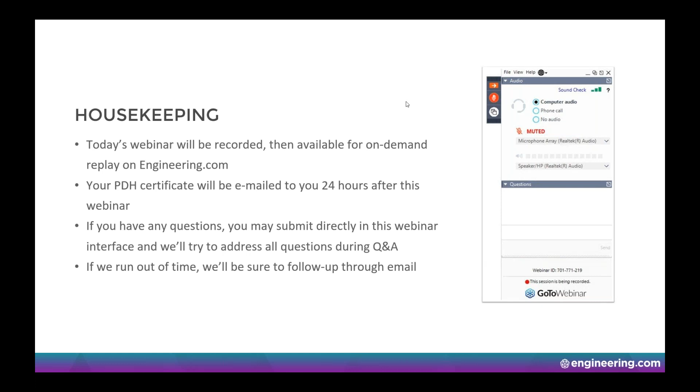Thank you very much for that kind introduction, Maria. Today's topic, as you mentioned, is the future of mobility and how a lot of the goals and ambitions of the future of the mobility market are really shifting how we are requiring the manufacturing design to be made for these modern vehicles. When it comes to picturing the future of mobility, there's a lot of different things we could talk about: e-mobility, autonomy, there's even some people talking about individual personalized flight as being part of the equation for future mobility.

And in that regard, that certainly creates a lot of pressure to engineer and develop the use of the lightest body material in order to address the range anxiety that would be brought upon by most vehicle electrification issues. What we're seeing is that before electrification was the topic of the day, it was always advantageous to try to find a way to make the vehicles a little bit lighter. We talked about fuel economy before and how making cars out of lighter, stronger materials was very important for making the most out of our gas mileage.

But now with vehicle electrification, there's even a greater emphasis on taking the kilograms of the body and transferring those into things that add more value to an electrified or autonomous vehicle. It turns out that with this shift from petroleum-based internal combustion cars towards battery electrification or maybe even fuel cell electrification, the cost per kilogram, or the benefit per kilogram shaved off of an auto body, becomes much higher than what it was traditionally for an internal combustion traditional bodied car.

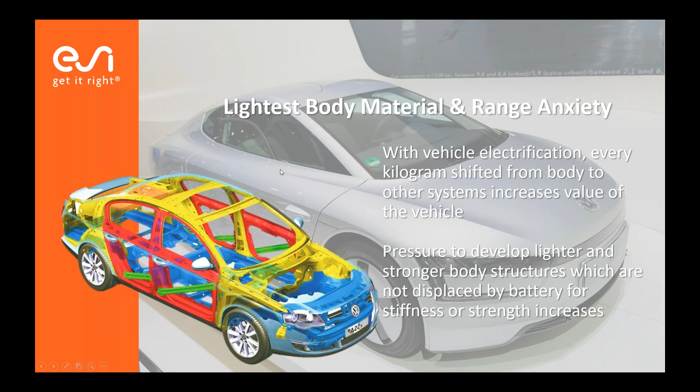So I'm going to start off with this relatively famous quote that is allegedly attributed to Henry Ford. Back in the day, people said Henry Ford was quoted as saying, 'Any customer can have the car painted any color that he wants as long as it is black.' That's the quote that I often read online attributed to Henry Ford. But the question is, why? Why was it important to restrict the choice of color to black?

It turned out that one of the reasons why all of those Model Ts were painted the same color was that it allowed them to optimize the production. By picking a paint color and paint formulation that optimized the fastest amount of drying time on that assembly line, they were able to standardize the assembly line speed and rate of production.

Now imagine if we tried to put the kind of flexibility that we offer today in different paint colors, but that also meant different paint drying times or curing times back in Henry Ford's day. That meant the conveyor line moving cars through the assembly line would not necessarily travel at the same speed on days they're producing black cars versus white, green, silver, or red. That would not have allowed them to optimize what we think of today as mass-produced auto manufacturing.

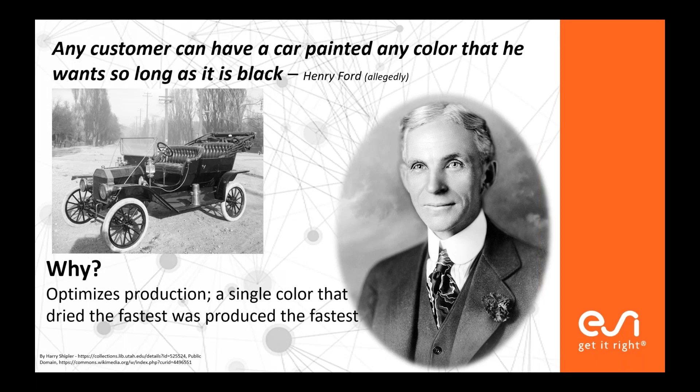So I want to take a small parallel to that when I consider what that means in today's auto industry. Here's a quote you could attribute to just about anybody who worked in the auto industry for the past 100 years: you can have a car of any material you want, as long as the bodies are stamped sheet metal panels welded together for subassemblies, then assembled as body-on-frame or unibody.

Because that's the conventional way cars have been built for the past century. Every time you talk to people about automotive body, the phrase 'body in white' immediately makes them think sheet metal, if not sheet steel only - stamped sheet metal parts welded together to create the auto body.

The reason why is that product performance and production capabilities have been well balanced for the past century. Making an automotive body as an assemblage of, in many cases, several hundred individual sheet metal stamped panels welded together has been outperforming most other proposed technologies for the past century.

Now, before I get too far, people could probably object and raise their hand with a question: weren't there examples of people doing things that were not stamped sheet metal bodies throughout history? Of course, we could each think of a handful of them. But the reason we can do that is because it was exceptional.

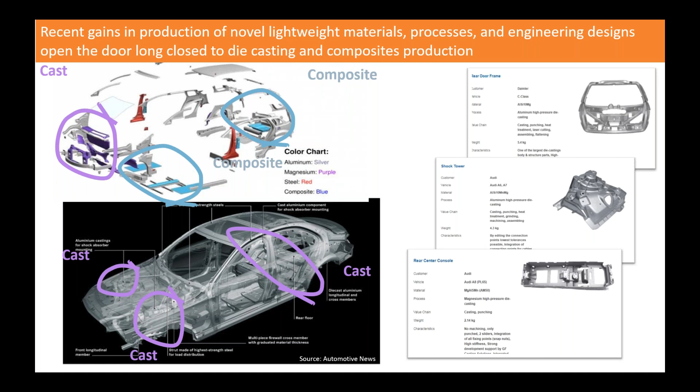But I've recently read a few articles about how Ford's been using that to address some of their mass savings, as well as a space-saving design for their Ford Explorer sport utility vehicle.

We're seeing examples where entire truck bed boxes are being put together with a mixed material structure, where we're seeing a mix of glass fiber reinforced carbon fiber composite materials. We're seeing steel and aluminum mixed into what normally was an all-steel body structure inside of a vehicle like that GMC Sierra truck box.

We're seeing vehicles such as the proposed Chevrolet Malibu and the Cadillac CT6, where they're looking at a mixture of steel, aluminum extrusions, and die-cast aluminum making up the bulk of these automotive bodies.

And we're also seeing things like that passenger bus in the upper right-hand corner being made of large composite panels to replace what normally would have been an array of different sheet metal parts stamped and assembled to make up that vehicle body.

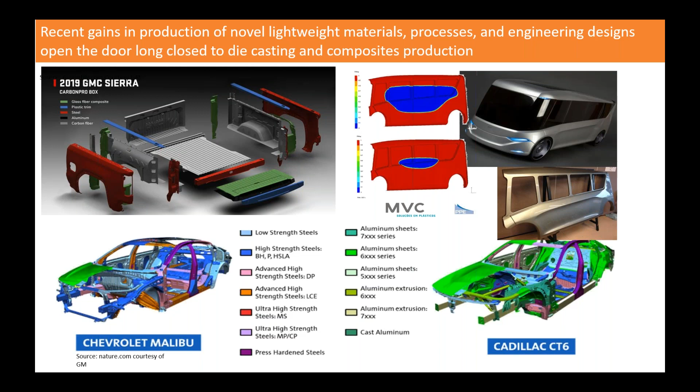So one of the things that we see in trying to address these goals of future mobility, and what they're trying to do to reduce the mass of the traditional automotive or transportation body, is embracing some of these novel manufacturing techniques like high pressure die casting of aluminum and the use of carbon fiber reinforced plastic. This helps drive down the mass going into the auto body so that they can put more mass into the battery, into the motors, into the passenger compartment itself, to put mass where the value added really is.

But this brings a lot of challenges to us. One of the challenges facing the transportation industry as they address these shifting manufacturing requirements is that they have to be able to predict with confidence the individual part production and the feasibility of the parts and the piece part costs of those individual parts.

And they have to do that very early. They'll need to be able to anticipate potential production issues arising from the as-designed geometry versus the as-engineered manufacturability requirements. And they will need to address and mitigate challenges with joining these dissimilar materials, with very different assembly and different materials, to address these assembly distortion issues that could happen. And they need to do all of this early enough to make a difference.

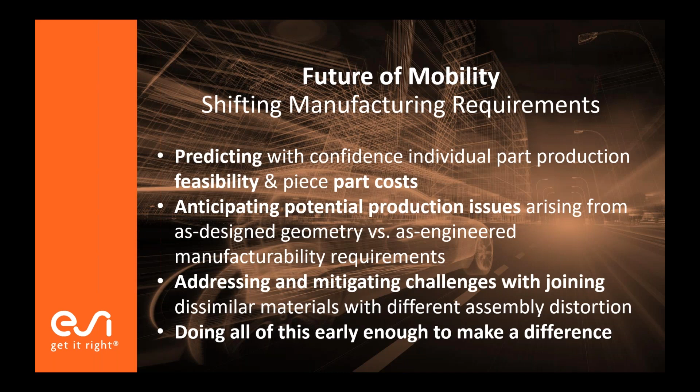That's probably one of the overarching challenges we face today: the individual automotive OEMs and much of the supply chain are all serving the industry where the manufacturing method dictates where that product goes onto the new cars. Now that I'm mixing ideas, like putting casting materials in with the body, we're mixing disciplines. Body used to just be a stamping world. Now body is a stamping, casting, and composites world—a very transformational thing that the industry will have to address.

Now, this is not unprecedented. We're not talking about anything brand new. I did a little research and found out that several years ago, Magna, a major automotive tier 0.5 or tier 1 supplier, had already proposed making a multi-material door at a lightweighting design conference. They proposed a mixed material ultralight door design that was functionally the same as a conventional door, but at a 40% reduction in mass.

They achieved this by mixing stamped sheet metal with high pressure die cast aluminum for the A-pillar reinforcement, introducing stampings combined with extrusions alongside normal conventional stamped sheet metal, as well as high strength materials such as warm formed aluminum for the door reinforcement beam, and possibly other advanced high strength materials elsewhere in the panel.

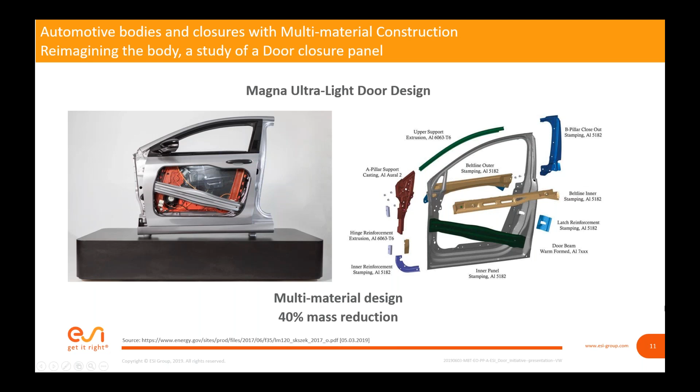That brings up a big challenge for the manufacturing industry to address this closure panel, which is presumably on just about every other car that you and I touch every day. It's all stamped sheet metal with trim attached to it. Now the idea is presented that an integral part of a vehicle, such as its closures, could in fact be made up of a series of materials. For that Magna example, it was predominantly cast material, extrusion, and stamped sheet metal, because those are the materials Magna is most often involved with in the supply chain.

Now I've introduced on this slide a possibility of a similar door using stamped sheet metal, high pressure die casting, and also composite materials to make up that door. Because maybe we could talk to other automotive suppliers, other members of the supply chain, who instead of just focusing on sheet metal and metal fabrication, were working on that full range of materials.

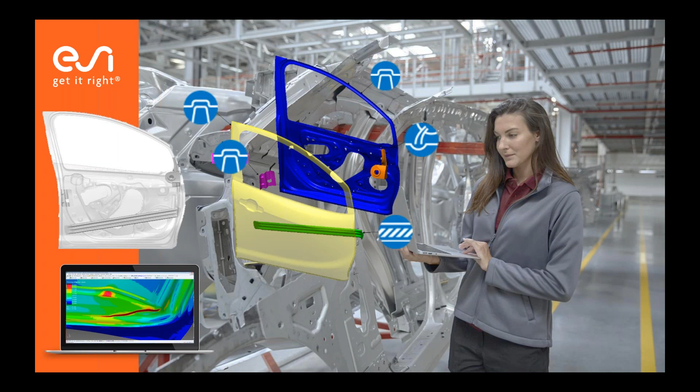That's what we'd like to address today: if we are going to address this idea of multi-material manufacturing, I'm proposing we do this in the context of what I'll call the ESI door. The ESI door is similar to that door from the Magna Group, proposed to be manufactured out of a variety and range of material manufacturing domains.

So we've introduced traditional sheet metal stamping. We can stamp the door inner and door outer out of sheet metal, in this case high strength steel and dent resistant steel. That's very typical for a conventional automotive body.

We could introduce an advanced high strength steel striker reinforcement, but now we could mix it up by proposing a die cast aluminum pillar reinforcement, similar to the one proposed for that Magna door, because maybe we can create an even lighter weight pillar reinforcement if we use die-cast aluminum to replace what in many cases is a mixture of many different stamped parts. Now we could have a single component taking the place of a more complex multi-body stamped and welded assembly.

Similarly, in this case we've proposed a cross member, but our high strength cross member maybe we'll propose making out of a composite material.

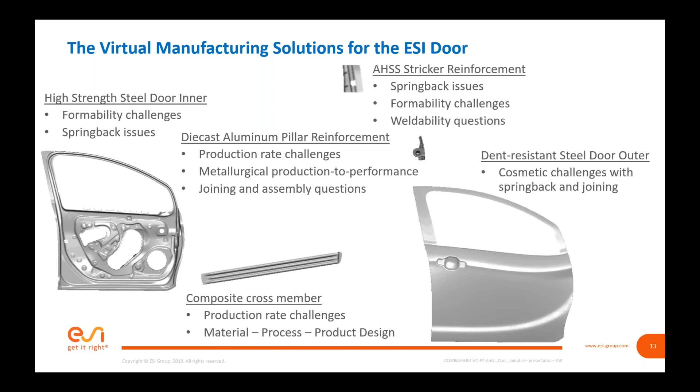But now people are talking about, in some cases, maybe it was 10 minutes per part. And how do we align these different manufacturing domains, these different manufacturing processes in order to combine into a single manufactured good. All of these are challenges facing today's automakers as they address this idea of mixing materials.

So first of all, I do want to mention that, in this case, let's talk about casting. People talk about casting and is it plausible and is it realistic that we can mass produce these mass reducing parts like a cast chassis or cast body structure in an automobile. A lot of people have said it's just not reasonable that we could ever meet the production rates necessary to support these large automotive mass production schemes.

They've been able to get a lot of efficiency gains in recognizing that every time you cast this complex chassis component, you are replacing a multitude of individual stampings, or in some case, maybe it might have been individual hydroformed rails or something making up a similar architecture body structure. If you were doing it that way, you would still have a much more complex manufacturing environment, because instead of being two large castings that made up that part of the body, it might be 20 or 30 individual stampings, countless number of spot or seam welds that would have to put that thing together.

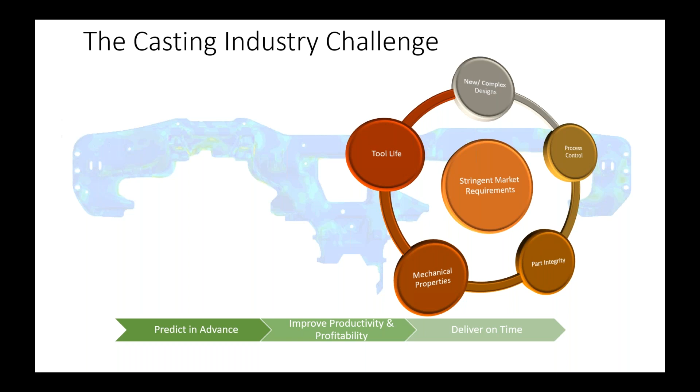And can I do so in a productive and profitable way? Can I achieve that high enough throughput and efficient enough use of manufacturing resources that I can, in fact, produce the part as necessary to be productive and profitable? And make all these decisions fast enough and early enough that I know I can go forward with this design or not.

So some of these challenges in introducing die casting into the body is that these die castings are being designed to replace entire subassemblies and complex structures for cost savings, but that also increases the make or break pressure on the manufacturability confidence.

Because if I'm talking about that shock tower in the Ford Explorer, and if I was doing this in a conventional stamped and welded manufacturing, if that shock tower did in fact have a manufacturability issue in one area, sometimes I can still change an aspect of that stamping or stamped assembly without severely impacting the cost of tooling, the cost of production, and even the entire product design itself along the way.

But now if I introduce this complex die casting to replace all of those different stampings themselves and those different subassembly operations, if something is found very late in the game to make that die casting impossible, then I run a higher risk that I just end up with nothing manufacturable in that shock tower.

Instead of asking for a small engineering change in a little bit of a reinforcement bracket or in one area of the stamping, I'm talking about major redesign of the product shape. And that could be very disruptive to our go-to-market confidence for these new vehicles.

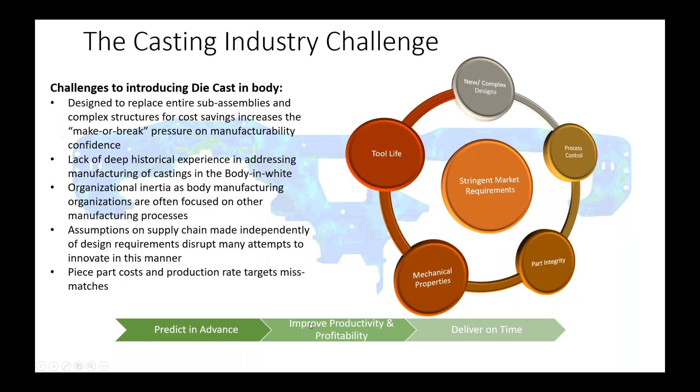So we introduced this idea that body manufacturing will need to, as early as possible, take into consideration the manufacturability of these body products, right? So they will have to very early be able to validate that the geometry of the part and the material properties of the part, as defined by its role in the performance, is a good fit—can the tool actually be filled with the molten material at the right production rate?

Will it cause or trigger the right behavior when it comes to the cast material solidifying? Will we have product performance issues and product shape fixation issues triggered by these challenges in turbulence and solidification behavior in our cast materials? Will we have the right microstructure once the material has fully cooled so that we have the right product performance, without introducing any sort of distortion or residual stresses that could cause our completed product to have the wrong performance characteristics?

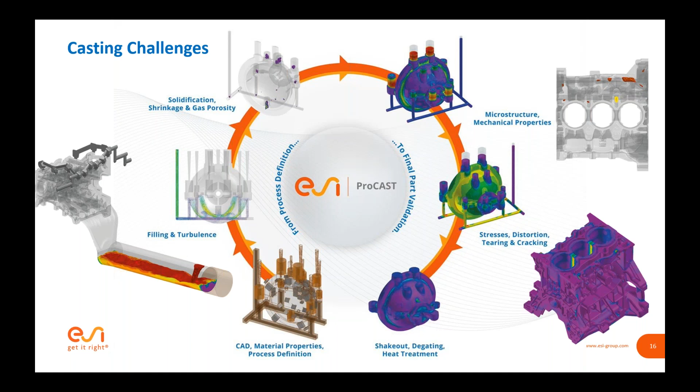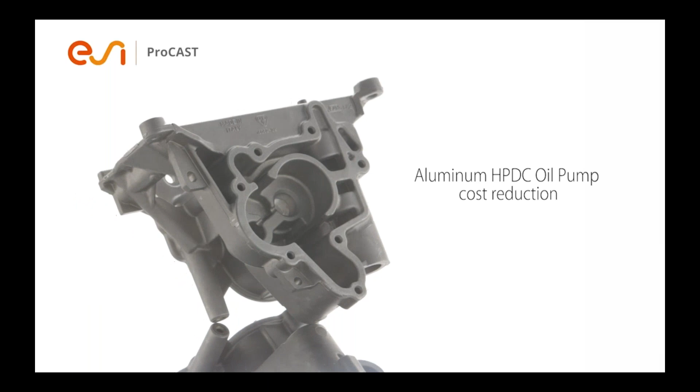So at this point, just want to introduce—I mean, this isn't a body component, but this is no more complex and no less complex than some of the body components that I suggested could be replaced with high pressure die casting in the future.

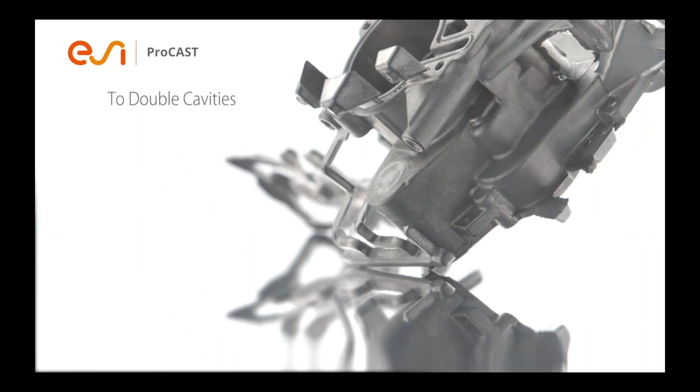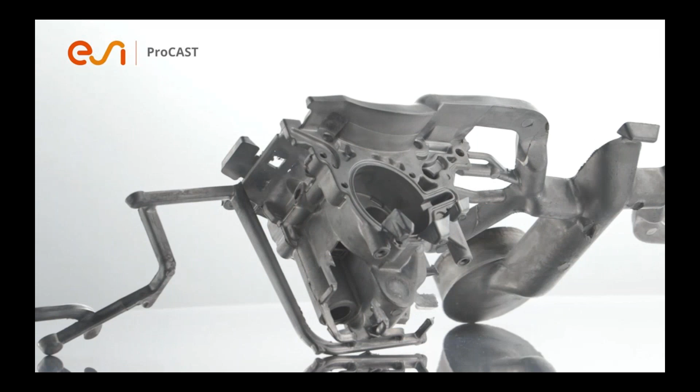And one of the things that helps introduce this idea of whether we can have high pressure die casting do the right thing for body manufacturing, is to see if we can increase the production rate.

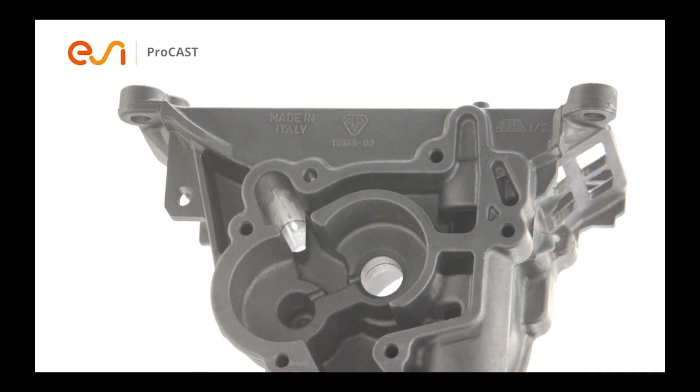So here's an example of how we were able to use predictive analytics to show that we could convert a previous single cavity die casting, which would have had a certain expectation for production rate, piece cost, and investment for the supplier to supply it. Now we're able to validate in advance that they could effectively double their production throughput if they moved from a single cavity casting to a double cavity casting.

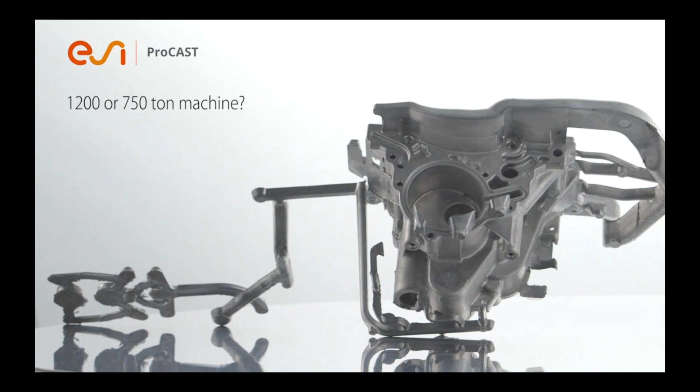Similarly, I have examples from some of our other automotive customers where we've allowed them to go from a 4-cavity casting to as high as an 8-cavity casting. And this is the kind of thing that'll have to happen for these die cast components to be able to fill the gap of the production rate expectations that people have for these body components expected in body in white and casting.

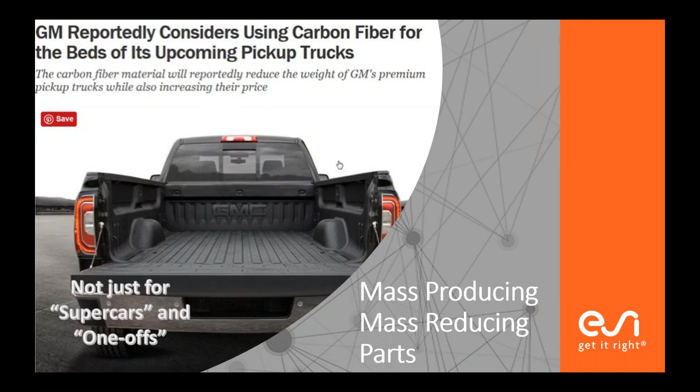The other novel use of material that we introduced in the ESI door is this idea of doing carbon fiber. Carbon fiber is one of those things people say, yeah, it's good for aerospace and supercars and specialty project cars, but not really suitable for mass production. However, GM is reportedly considering using carbon fiber in the beds of all their pickup trucks. Actually, this is a relatively old picture, and this is already their current GMC Sierra pickup truck.

So now when we think about composites and what challenges they represent if we want to integrate them into our vehicle bodies and body structures, we see how different composites engineering is from other ways of engineering vehicles. One of the things I've learned in my recent education about composites is that product design and material selection are totally inseparable from considering the manufacturability of that component. It's impossible to decouple the idea of a net-shaped composite and assume it's crash-worthy without someone proving that composite structure is even plausible, just from getting the alignment of the glass fibers correct, and the type of resin and its behavior.

So this idea of engineering individually the product design, material selection, and manufacturing - you can't separate those when you think about composites. This iterative loop between product design, material, and manufacturing is always concurrently going on for composites manufacturing. It's nearly impossible to assume something is good without doing physical testing, and again proving that the manufacturability of that part is correct and achievable in the physical world. This has been a challenge for many people trying to figure out how to mass produce composite parts to satisfy the needs of the auto industry.

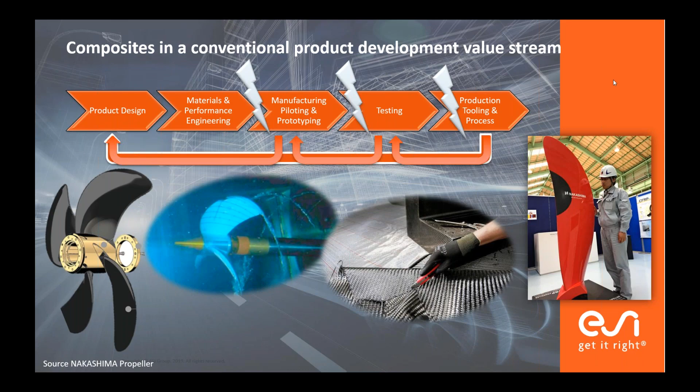So that means in order to address this, we have to do our best to address those challenges in advance. One of the challenges in composite manufacturing is that, again just like casting, if we're designing that composite body to replace a whole set of other individual stampings and subassemblies, that really drives up the pressure that every composite body component is really make or break. You really have to know that individual part is feasible far enough in advance to know whether or not you're replacing those other components out of sheet metal.

We still have this lack of historical experience of people in the auto industry who've worked with different resin formulations, different fiber types, different manufacturing modes for these carbon fiber reinforced plastics materials. We still see that having a body organization look at more than just sheet metal stamping is going to be a challenge for many organizations. We see that suppliers of body components are really just hyper-focused on, oh, they work in sheet metal and automotive, then they can do body. But as soon as you introduce the fact that there might be composites in that body, the sphere of people who already have experience at industrial scale shrinks.

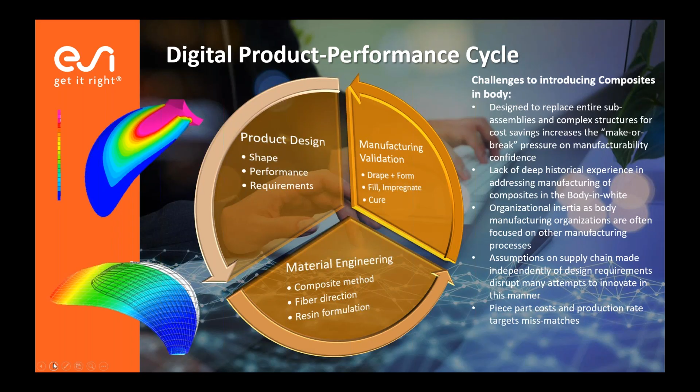So early enough in the manufacturing scheme, we have to make sure we are in fact predicting that these composite materials are manufacturable in themselves. Are we getting the right production rate out of these materials? And will these materials behave properly when we take the individual fibers into sheets of fibers and preform them into their shape?

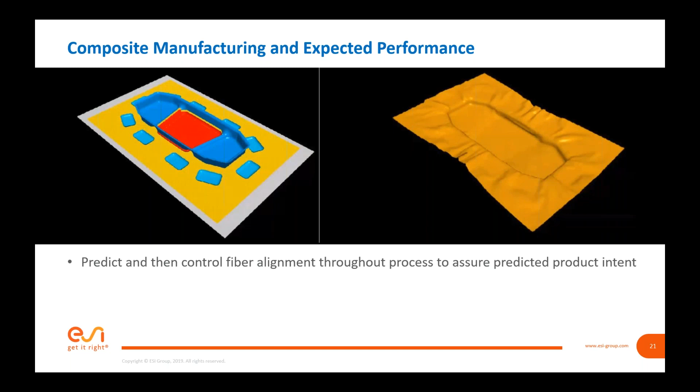One of the reasons why there has to be such tight alignment between the product design and the manufacturing is that the product design for composites is very focused on the alignment of those individual reinforcement or glass fibers inside of that composite. We make certain assumptions about that when doing crash analysis or structural and vibrational analysis of those components. But we have to be certain that in the manufacturing of those parts, are we maintaining that same alignment? So in this case, we're looking at a simulation result where we're analyzing how many degrees of shear or angular change there are for those fibers.

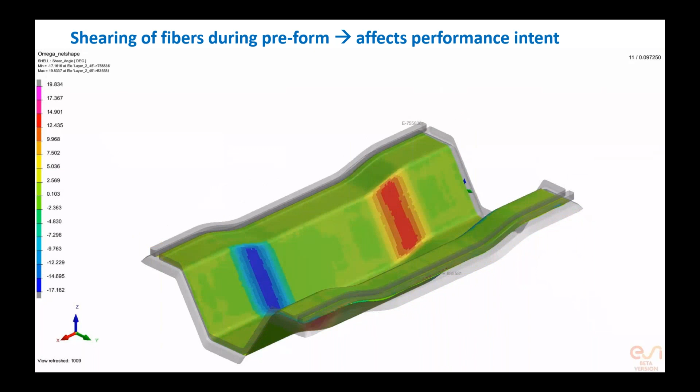Getting this angular shear of more than 10 degrees means I have to really consider: did I do my structural analysis with the right alignment assumed for those individual fibers? Or did I assume the fibers were all running in a certain orientation relative to the product shape itself? That's going to distinctly change the results of a structural analysis. If you're thinking about composite materials, this idea of decoupling the product engineering performance from the manufacturing engineering performance is really just not sensical. You really have to find a way to address those at the same time.

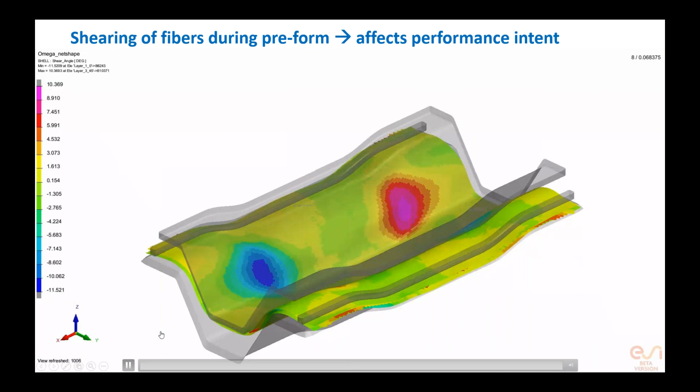Other considerations for manufacturability that people in the body manufacturing world might not have realized happen with composites is that you have to be concerned about resin filling. Similar to challenges in casting, we have to make sure we have the right formulation of this material to assure we've filled the entire composite body prior to the conclusion of the curing or polymerization of that resin. Because if that resin cures enough, that cured resin will have a different viscosity. And if the viscosity gets too high, then we see the pressure getting too high. We can also see distortion of those carbon fibers above and beyond any distortion that happens just due to the preforming of those dry sheets. That again would change how confident we were regarding the structural performance of those composites.

These are questions that are not common to people working in the auto industry, who are used to, in body in white manufacturing, production rates of 5, 10, 15, 20 parts per minute. Now we're talking about composite resin decisions where we might be choosing between 2 minutes per component or 20 minutes per component, based on the resin requirements and behavior of the materials we select. We have to know that very far in advance for engineering these cars to include composites. Chances are there are currently several examples in industry of people who've come out with composite components for mass-produced cars facing these exact challenges today, where the composite manufacturing process and material they selected was really a mismatch in piece cost, production time, and investment.

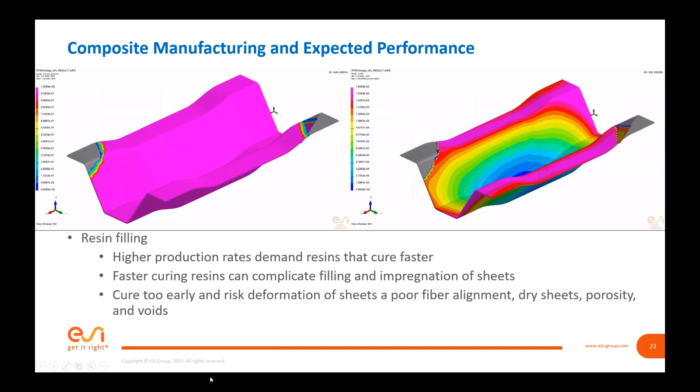So if you want to do a good job of planning for and engineering the right mix of materials, for composites you also have to plan for how you preheat, close, or preform those composite dry sheets. Can we infuse those sheets with resin in the amount of time allocated for the production rates we want to achieve? Can we cure that resin appropriately so we get the right reactions? And is that going to introduce a difficult to mitigate amount of distortion - not springback, but analogous to springback when we think about composites - this idea of curing-based distortion.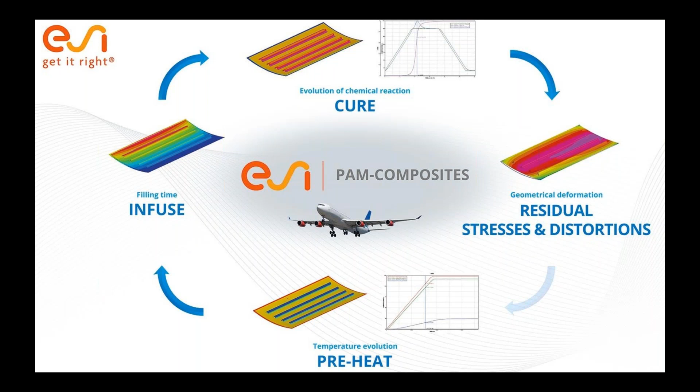Of course, in this idea of a mixed body structure, we still are looking at stamping sheet metal. Stamping sheet metal, probably for the foreseeable future, is still going to be a key component of every body manufacturing program. But that does introduce its own individual challenges.

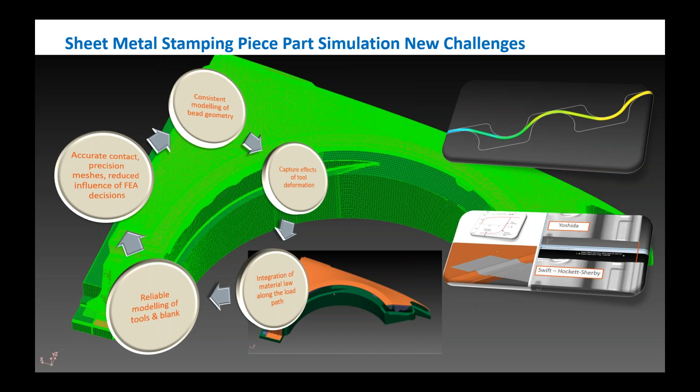When we think about the challenges we have to adapt to for this new future of mobility, we have to recognize we are seeing increased use of newer lightweighting materials, these higher strength materials such as advanced high strength steels - multi-phase, dual phase, hot stamped materials used in steel - but also lower density materials like stamping aluminum, stamping different alloy sheets, to see if that will get us the right balance of strength through the material's elastic modulus and thickness, and also the right weight performance so we can extend the range of these electric vehicles.

We see increasing quality standards regarding shape fixation, and at the same time we're introducing materials that tend to have higher amounts of springback. We're seeing many challenges in how we weld these dissimilar materials, these non-typical metallurgies. When you think about use of steel or sheet aluminum, we hear a lot about tailor welding, tailor rolling, patch welding, and other construction options that are increasing the complexity of the conventional automotive sheet steel body or sheet metal body, and of course the assumptions that come along similar to the other materials we've mentioned already today.

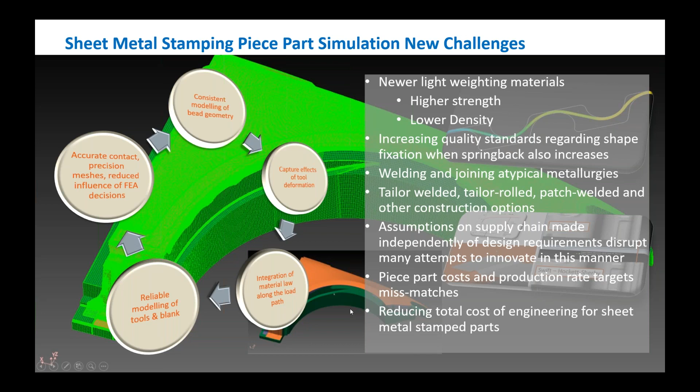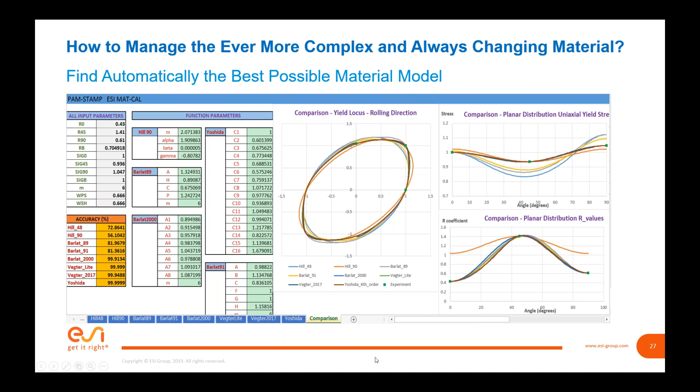This means being able to and being well prepared to address this ever-changing material model. Sheet metal, sheet aluminum, sheet steel material modeling is something that's still kind of an evolving science. We have to, in our engineering and manufacturability organizations, be well prepared to address this evolving landscape of these differing materials. We also want to do things that help improve predictive confidence for these manufacturing organizations.

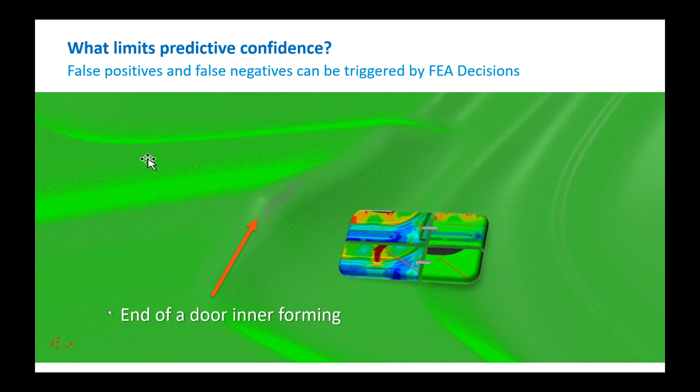One area where people in body organizations really run into challenges is the idea of a false positive or false negative triggered by a decision to run that mathematical model a little bit faster. In order to make this FEA model run faster, I reduced the number of finite elements, or reduced the complexity of the mesh, which made the sample run faster. But it also might give me false positives or false negatives for the safety of that process.

One of the things that's doable today is to take away a lot of the necessity to optimize this finite element math in advance and just run with a super fine mesh right from the beginning. Maybe that's my way of improving my predictive confidence in my sheet metal or sheet steel stamping solution.

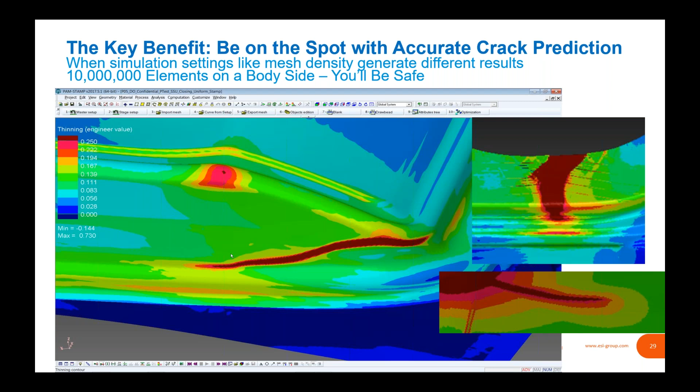By doing so, I can take away any of that question of, early on in my engineering process, I was using a coarse mesh because I wanted my answers to run faster. Then I invested so much time in using this coarse mesh, and when I go to a fine mesh, all of a sudden the results look different.

We can do away with a lot of that uncertainty if I can just run with a uniform mesh throughout the entire process. That might be computationally a little bit heavy, but if it reduces the amount of hand-wringing or uncertainty over whether I asked the right model solution questions, I can address that earlier.

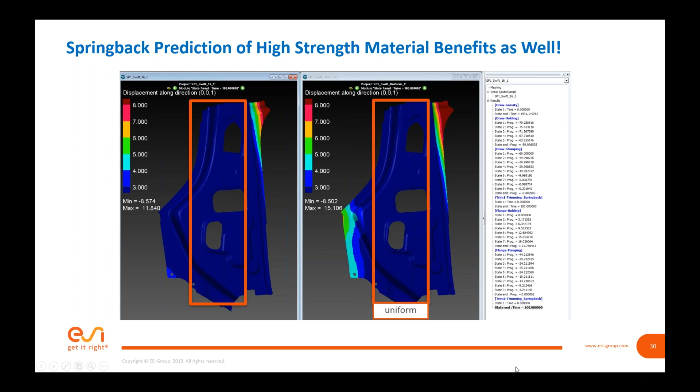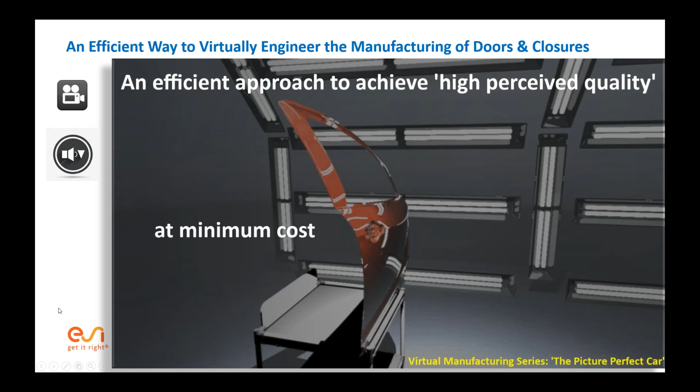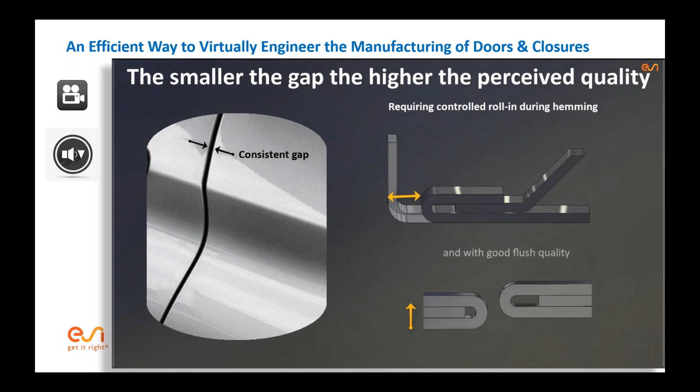One of the things we've recognized is that there is a good workflow achievable if you can try to address these issues earlier on. In this case, we're looking at a stamping and subassembly of two different pieces of sheet metal, the door inner and the door outer, making sure that we achieve a high level of perceived quality.

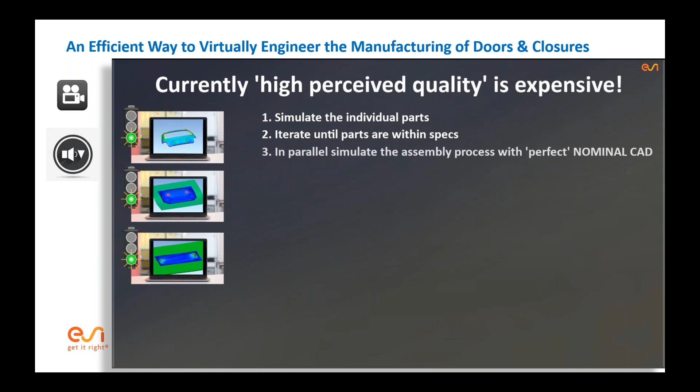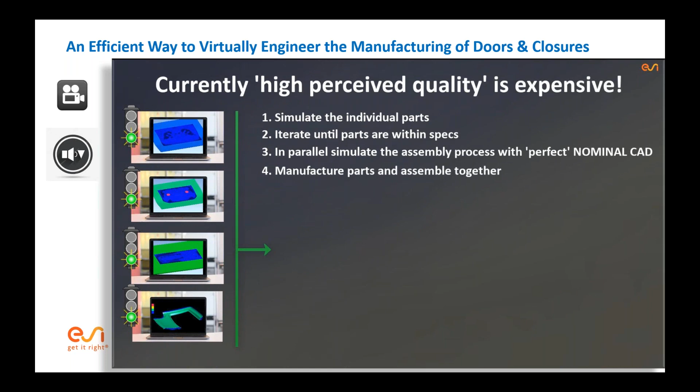This in the past has been very expensive to do, because usually that meant running three discrete simulations for an inner, for the outer, and for some reinforcement. Then I would try to combine those together and assume that if the individual things work individually, of course the final thing should work out right.

However, we still find that in the execution, certain things can still go awry. If I can do so, I can optimize this to get the right assembly ahead of time by avoiding rework, by simulating the whole assembly process within an environment that allows me to do so.

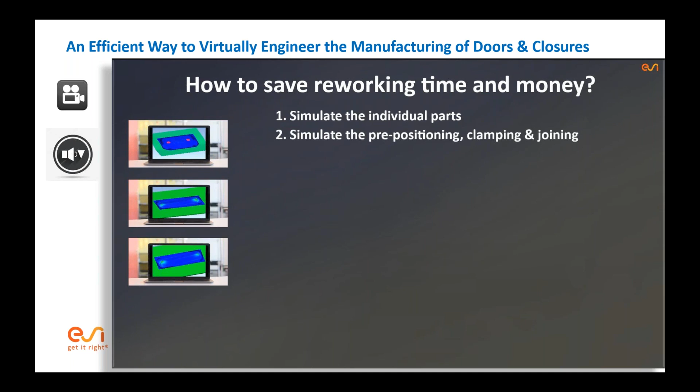That I can look at the individual manufactured parts - I should stop saying sheet metal because we're considering making them out of different materials - and I can simulate the individual parts individually and simulate the subassembly and assembly operation.

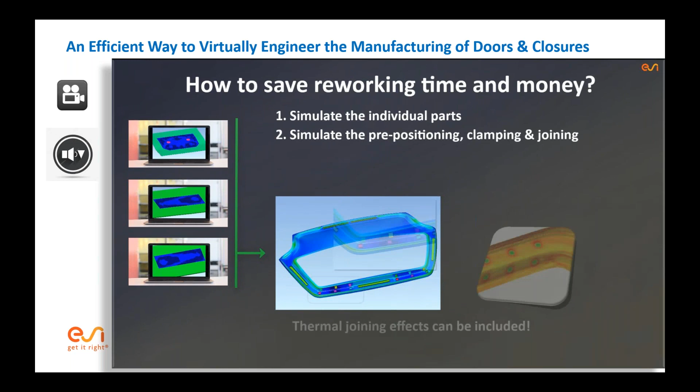This takes into consideration things like the thermal effects of spot welding, the elastic behavior of the part during clamping and the welding operation, and then merges that with the simulation of the joining of the inner to the outer, recognizing the accumulated distortion as to whether or not we're inside the window.

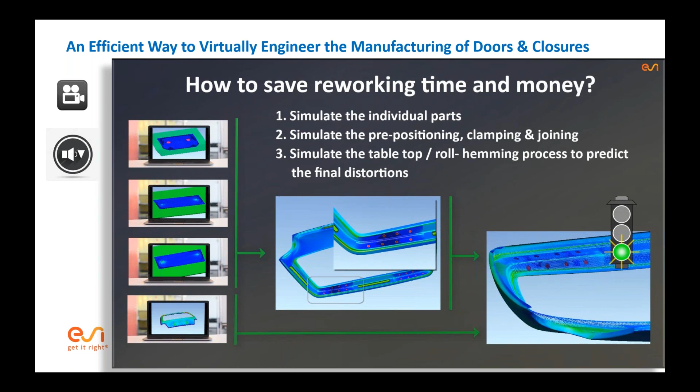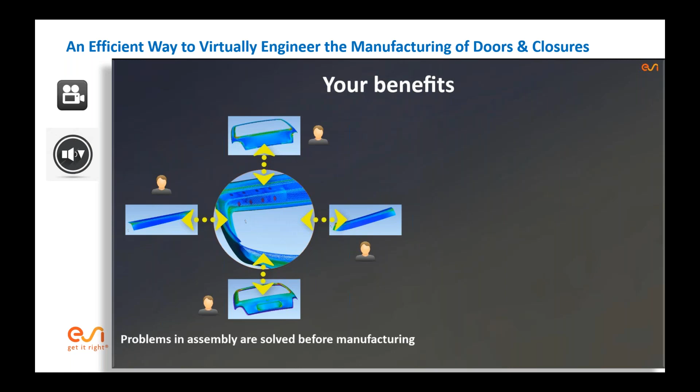This is difficult to do if we're considering all of those parts individually from individual engineers in disparate or dislocated tools. Instead we have to try to find a way to get all of them to contribute into this common assembly.

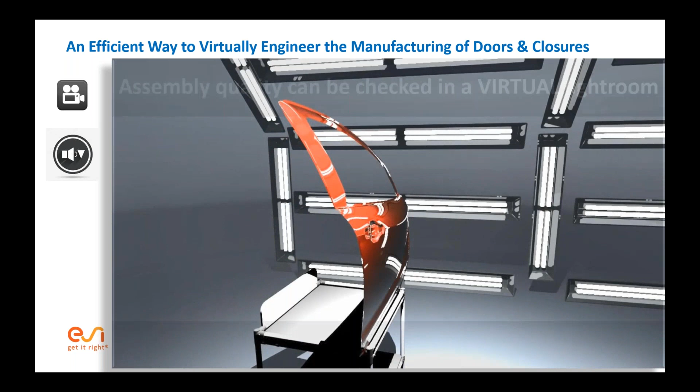Another thing that's difficult about predicting the final shape and distortion of these finished parts is that a lot of the numerical prediction of distortion in the past has been based on an interpretation of mathematical outputs coming from a simulation code, as opposed to trying to really validate what it looks like in the end. That's what the very end of the video was trying to show here.

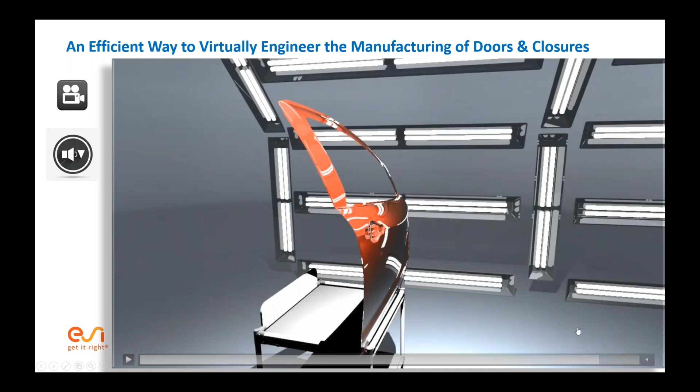We've introduced a way of replicating the visual inspection of these components and their accumulated distortion by using a visualization method, as opposed to looking at arbitrary numerical parameters to try to describe the overall amount of distortion.

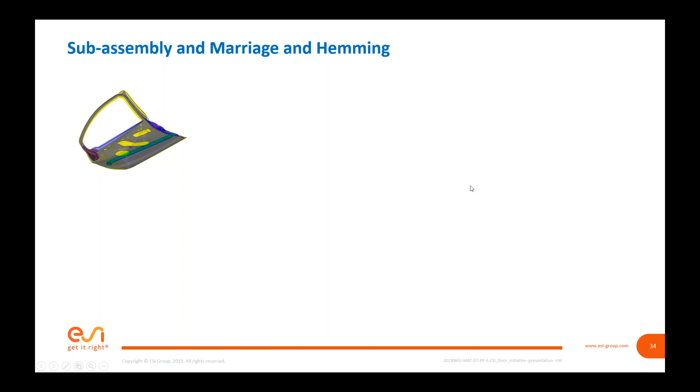And lastly, the challenge that we have is that when working with this multi-material idea, we have to consider how we assemble these parts - not just sheet metal parts, but also the die-cast aluminum reinforcement and the composite door beam. We have to assemble these individual pieces into a cohesive assembly, the same way manufacturers like Tesla and Ford had to do when they incorporated die casting into their manufacturing environment.

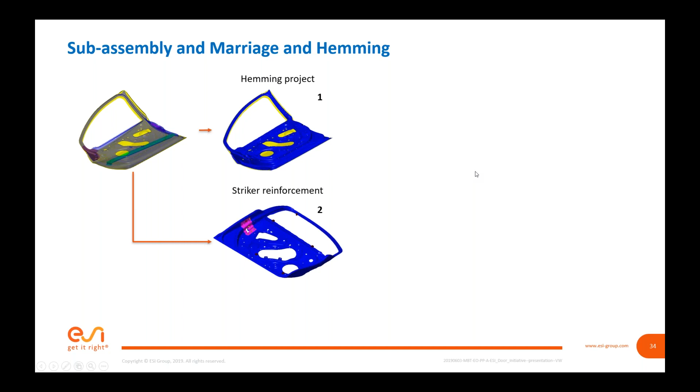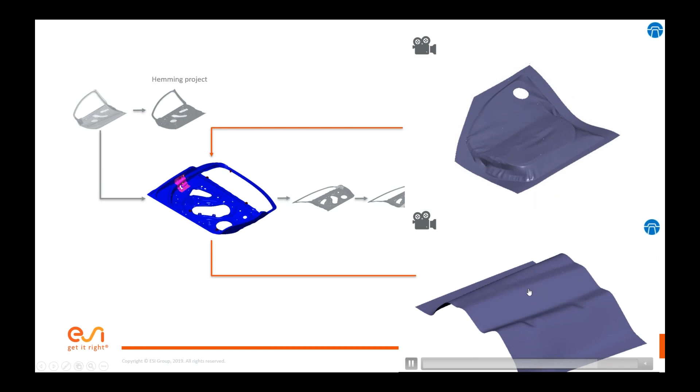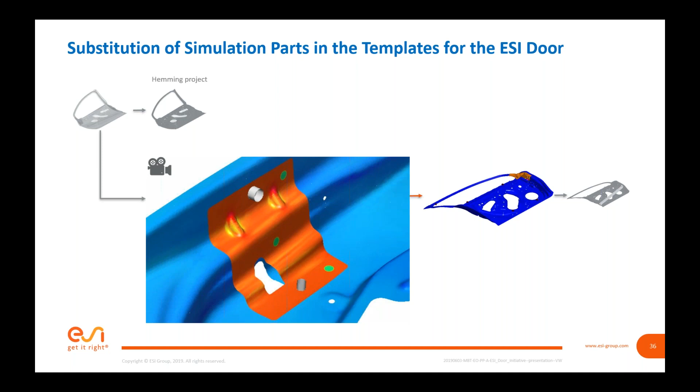So in this case, that means having a timely prediction for the behavior of that inner sheet metal part and the reinforcement that goes where the latch mechanism, or what I labeled the striker, goes. We can simulate their formability individually as sheet metal stamped parts, and then consider how they're going to behave when we assemble that reinforcement panel to the inner sheet metal. What happens when we take that thick, strong piece of metal that makes up the reinforcement and weld it to a slightly less thick and less strong piece of material, such as that deep drawn door inner? That's going to introduce a different amount of distortion than if those had been very similar parts.

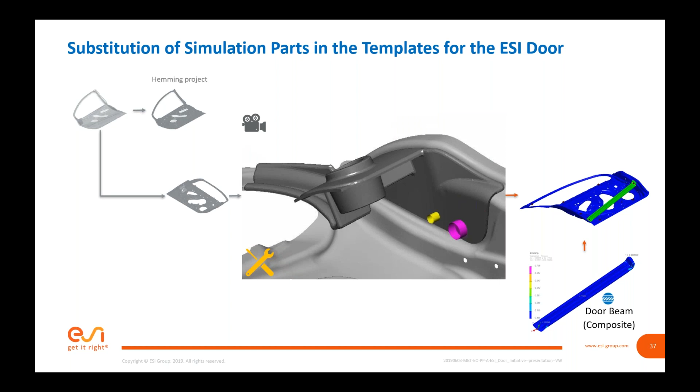Similarly, it's a challenge to think about what happens when we join this die-cast aluminum part, affixing its very stiff and strong structure to that slightly thinner and unreinforced door inner. What's that going to do to the shape of the door inner we're trying to complete? And the same thing goes for that composite.

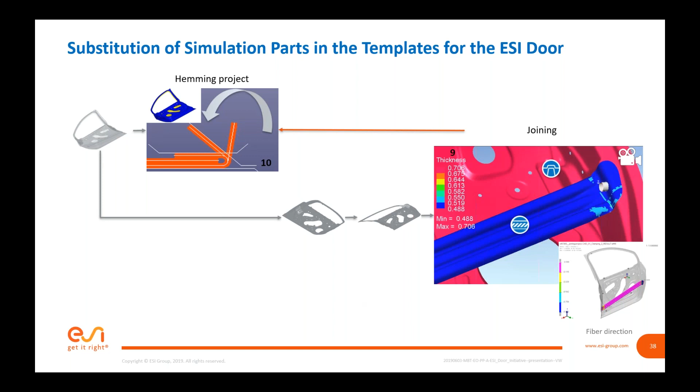And I guess the moral of the story, since I'm almost at the end of my time, is this idiom I've heard: if the only tool you have is a hammer, then every problem looks like a nail.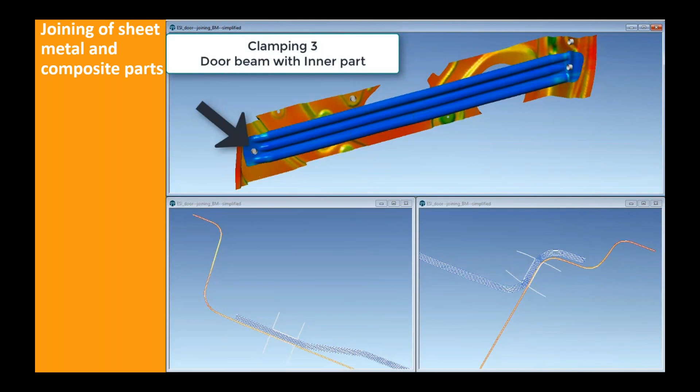And that's kind of the risk we have for people addressing this future of mobility and the shifting world of manufacturing for future autonomous and electrified vehicles - if we just think of the body as always being this monolith of sheet metal that's welded together, we'll probably just keep making the same old thing we've always made in the past.

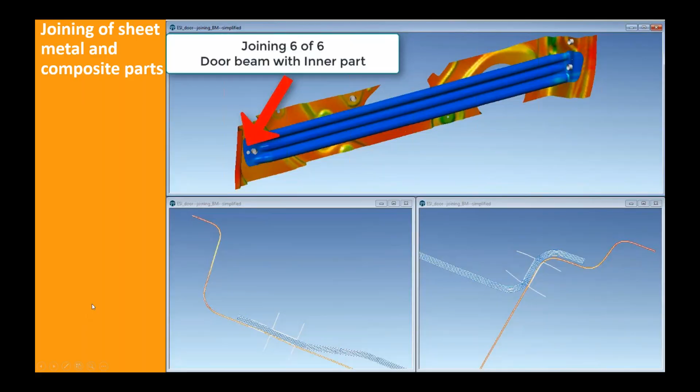But if we want to adapt and be ready for the future, we need to acknowledge that the individual manufacturing that goes into a body might no longer be monolithically sheet metal anymore - that joining will not always be welding, but can be screwing, riveting, and gluing the car together. These different components might come from foundries instead of always from stamping plants, and some will come from composite workshops. We have to be ready and adaptable to address this future of manufacturing.

And recognize that we probably won't end up in a world where there's a magical numerical parameter from my finite element or computer-aided engineering tools that tells me the part is the right shape. Instead, I have to look at the springback results - not just springback, but the springback, distortion, and overall final shape of those individual components - and find a way to join them together so I can predict the visual quality of those parts, as opposed to some abstract numerical parameter.

That's going to be a really hard challenge to address if I'm the person whose only tool is a hammer. I need to be ready to have a broad tool set available to our manufacturing environments to address the fact that an automotive body in the future is not this monolithic stamped result - it could come from a variety and range of manufacturing methods.

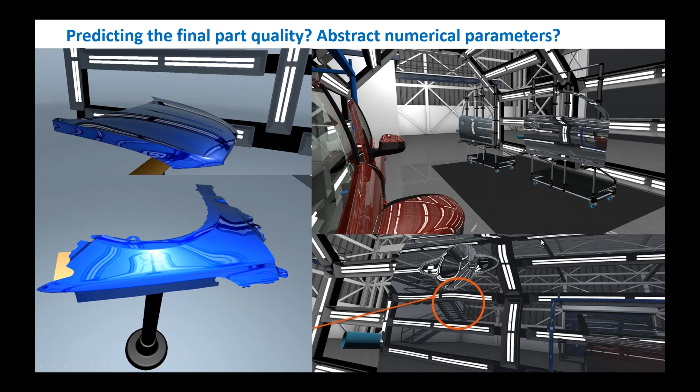And that brings me to the end of my monologuing. What questions might we have?